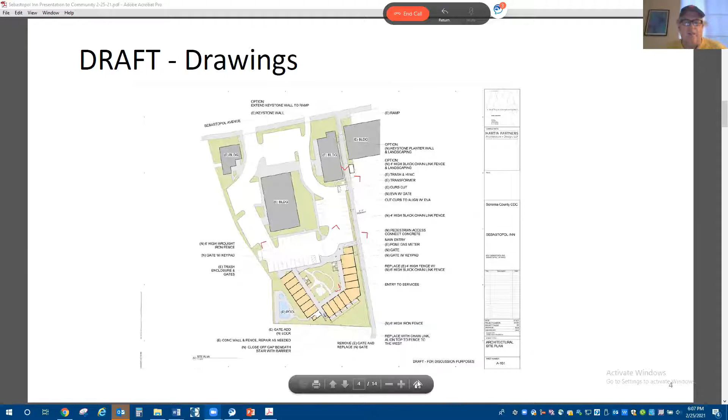I think that one is Paul. It is me, that's you. I didn't realize I was on mute. Yes, this is for Paul. If you want to focus in a little closer, Rohish, on that, it'll help everybody.

This is a site plan that shows Gravenstein Station and the bike center shop building next door. Elderberry Commons is at the bottom of the slide in the light pink area, and then the other 3 buildings are Gravenstein Station, the rest of our common development, and the building on the upper right is the bike center. The Rodota Trail runs from the bottom to the top - it's where the trail enters the city of Sebastopol. This drawing gives us an oversight of the general area.

To the right of Elderberry Commons, the former Hotel Sebastopol Inn, is the Wright construction residential development that's underway right now, under construction.

Rohish is going to post these on our website so you can take a closer look at them. There's a lot of information here about the details of what we're talking about in terms of fencing, security, landscaping, and things of that nature. So next slide.

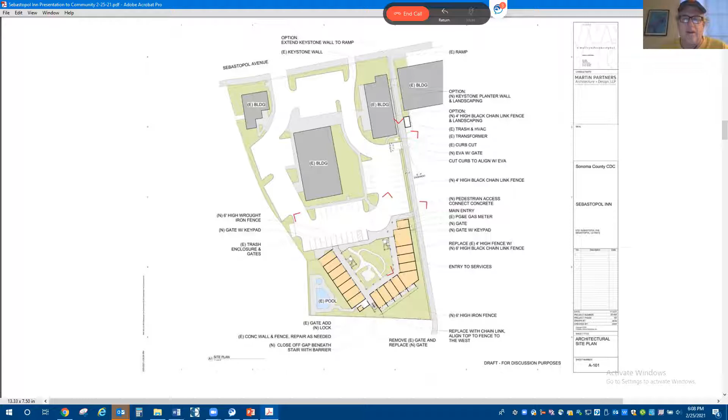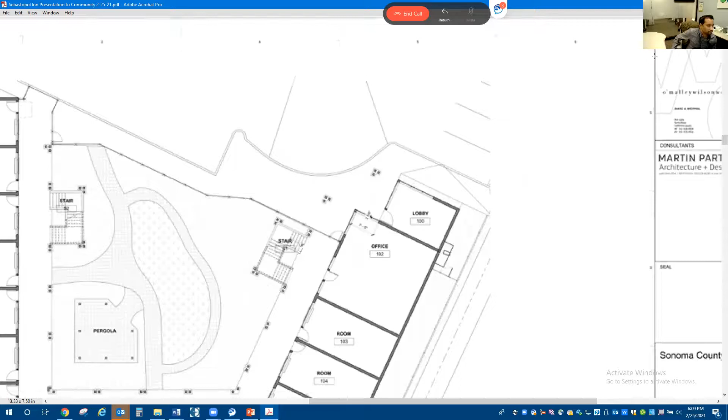Really focus in close on this one. Sorry, that's okay, I'll just keep talking. So this is the floor plan of the hotel, of the property.

The courtyard area is landscaped, and you'll see a little bit later, we're going to enclose the entire property with fence and security so that nobody can enter the property unless they are a resident or a guest of a resident. So we're going to have a system where the card keys are the only way to get into the property, and it'll give some security for the residents as well.

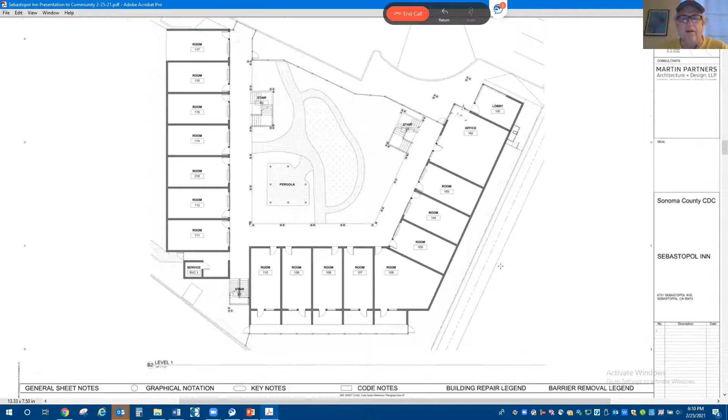So for those of you who haven't heard this, the program that we acquired this property under requires us to operate it for the interim as transitional housing for COVID vulnerable homeless. But we will be converting this to permanent housing. It's income restricted, no more than 30% of the household income. Our current plan is to take the rooms and add kitchenettes, which will allow 31 efficiency apartments in the final configuration.

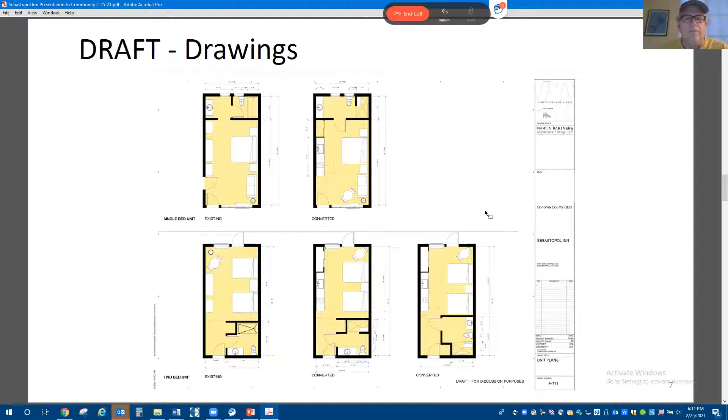If you focus in a little closer, Rohish, we wanted to be sure we could fit the kitchenettes and make sure the apartments were workable. So we've done those architectural layouts and confirmed that they work. Next slide, please.

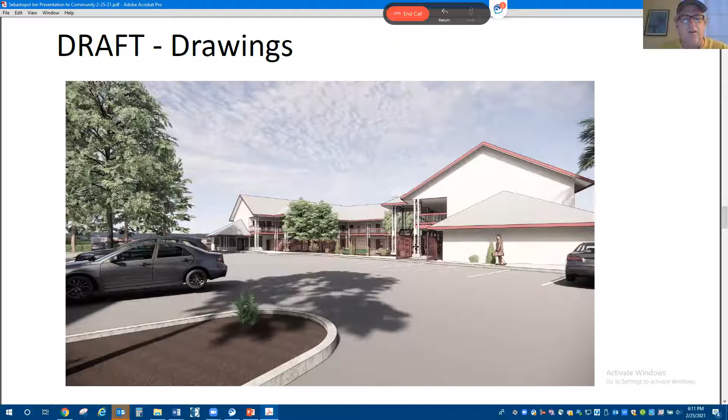This is looking at the property as you drive in from the main entrance off of Sebastopol Avenue, just past the main Gravenstein Station building that has Coffee Catz. If you focus in closer, you can start to see we're proposing a wrought iron fence across the ground floor so that provides security, so people cannot come and go unless they have a card key or check in at the office. Next slide, please.

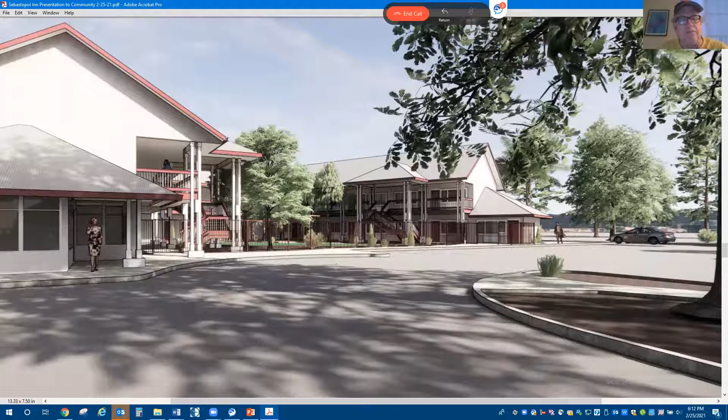This is looking at the property from the parking lot nearest the Rodota Trail. That's the office on the left. You can see the fencing, or gate, fits in with the architectural style that's already there. Next slide, please.

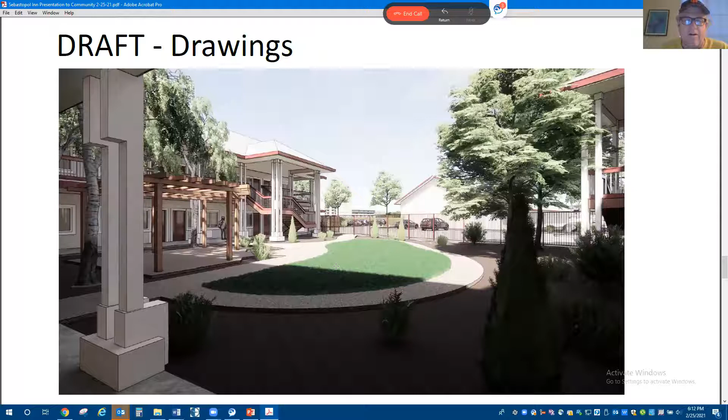This is looking from the courtyard out towards the parking lot. You can see it's a pretty nice landscaped area. I think Michelle can tell you the residents are probably already using it and enjoying it. It's a nice outdoor safe area. During COVID, that's the preferred area to gather. Next slide, please.

This is looking back at the parking lot from the Rodota Trail, between the front Gravenstein Station building and the bike center building. What we heard from the last meeting was that people were worried about two things: people just walking through the parking lot, homeless and others, and emergency vehicle access from the mobile home park and a little further over on the other side of the bike center parking lot and the residential development. So what we've done here is proposed a chain link fence that runs along the edge of the trail, and you'll see where our main pedestrian entrance is back by the hotel. But this would allow emergency vehicle access from all those properties through the Gravenstein Station parking lot. We're going to lose 2 parking spaces here, currently allocated to the hotel and the future residential. But from what we heard from emergency responders, the fire chief, and everyone else, this is a fairly important component.

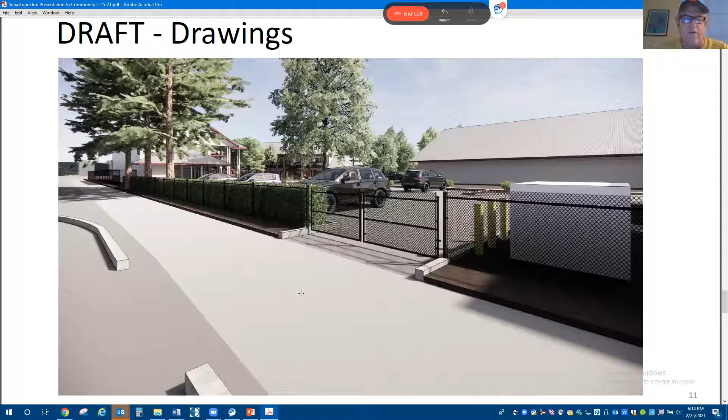Next slide, please. This is at the Rodota Trail leading into the property, Elderberry Commons. Our office is there. There's fencing we'll put in new fencing along the side of the hotel that faces the Rodota Trail. We're going to widen this to make a real clear entrance where people will be able to come into the property to get to Coffee Catz, come here and get into the property from the trail, as well as from the other residential development, which actually won't have a fence on their side of the trail. Next slide, please.

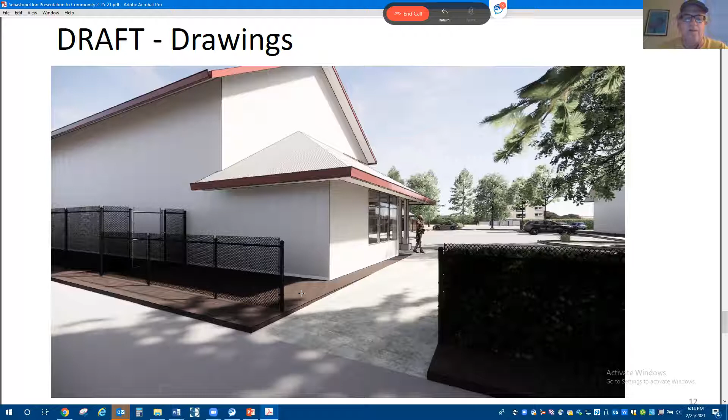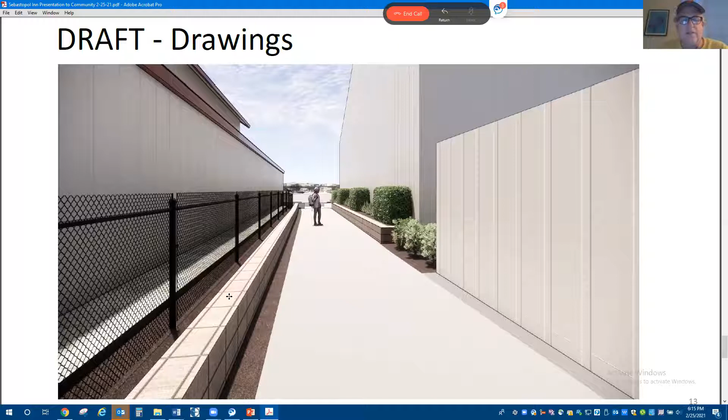This is looking at the two buildings right at the very end of Rodota Trail as it reaches Sebastopol Avenue. It's not a great view, but if you've been out there recently, these are the backs of both buildings, and they're not very attractive, a little shabby. So our proposal is to extend the fencing all the way to the street on the Gravenstein Station side, and then landscape and upgrade the landscaping on the Bike Center building side to get that a little more consistent. Next slide, please. I think that's it.

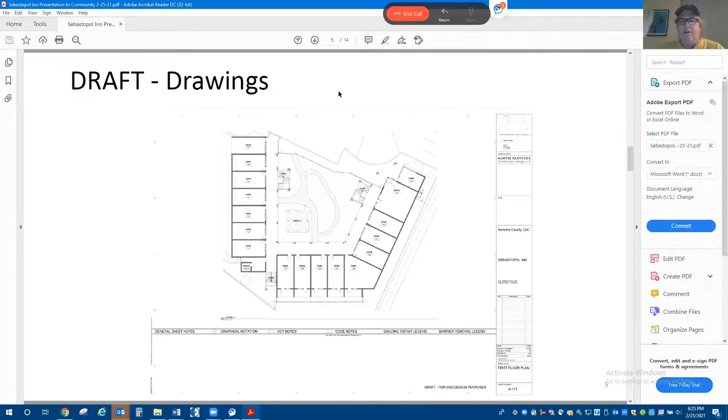So the short answer is it will be very difficult, we can't really do anything about pedestrian access going to the east, to the sidewalk and into her parking lot, because there are lots of open areas where people can just walk through anyway. So it's not really something we can fix, if you focus in on that really tightly, Rahesh.

Which area? Just to the edge of the building. So why don't we keep going, and I can try to, if you let me share the screen, I can bring up the other side, it'll take me a while.

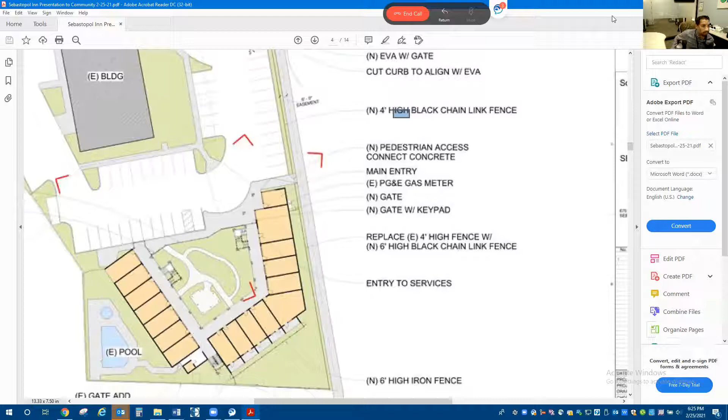Paul, in my notes we have that the woman who's the owner, her name is Pamela, and the concerns were about people choosing to go through the parking lot instead of Sebastopol Avenue. We had also talked about whether there were pedestrian safety issues with people walking around in the parking lot, but it sounds like that's the existing condition.

So I don't know how you want to handle it, but we can't really do anything about it. There's a lot of grade changes, and we will not be able to prevent people from walking through the parking lot. If I can break in and make a comment, I think the condition of that parking lot's going to change because those condos are being built back there. So suddenly there's going to be a lot more people and activity that is really positive, with residents there. That's going to make the space more filled with positive activity and not as much negative activity.

All right, thank you. We have some questions in the chat. First question from Jennifer: Are residents currently housed at Elderberry Commons going to transition into permanent residence, or are they going to have to leave and new residents will be brought in after the COVID period?

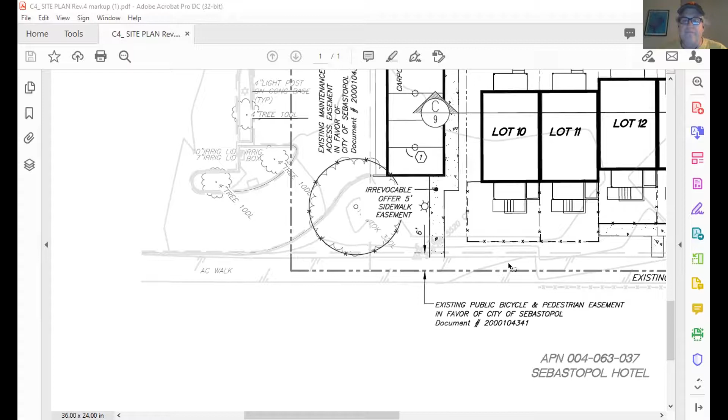Right, and again, that was the site plan for the condos that are going up. Correct — they're rental, at least they're going to rent. I plan to rent them to begin with.